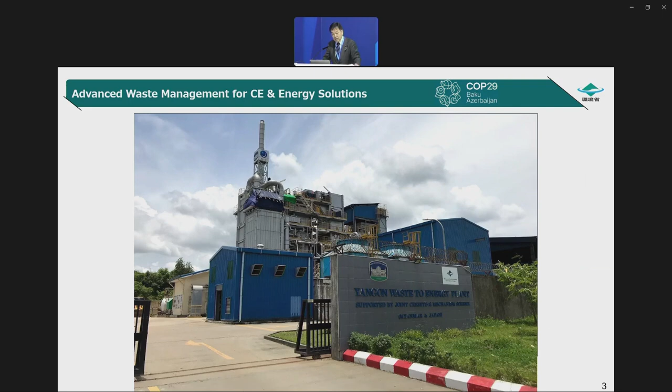At today's seminar, I understand that people from Japan Environmental Facilities Manufacturers Association, or JEFMA, will share their latest technologies and experiences that contribute to both decarbonization and resource efficiency. I believe this will be of help to many countries facing waste-related problems. I conclude my remarks with my wish that today's seminar is very fruitful. Thank you very much, everyone.

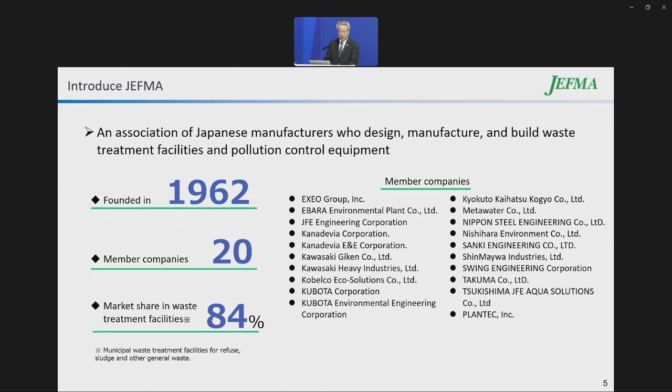JEFMA was established in 1962 to provide excellent waste treatment facilities through improving each other's technology. With 20 member companies, we have constructed about 84% of municipal waste treatment facilities, maintaining high quality standards. Let me explain what JEFMA is doing.

Today, we face two big challenges towards the realization of a sustainable economic system. One is achieving a circular economy, and the other is fighting climate change. These two challenges are closely connected, and we need solutions that achieve both at the same time.

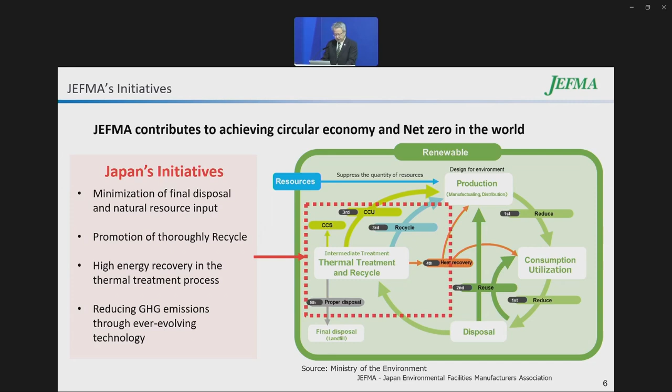While promoting the 3 R's - reduce, reuse, and recycle - we focus on 2 things: recycling as much as possible and getting the most energy from waste. This way, we contribute to both resource circulation and decarbonization.

In Japan, rapid economic and population growth led to increasing waste. This caused problems like bad smells from landfills, dirty water, and pest problems. Additionally, Japan doesn't have much land, so we needed a solution for landfill site shortage. That's why Japan promoted the introduction of waste-to-energy and material recycling facilities from the perspective of sanitary waste treatment and volume reduction. As a result, nowadays, very little waste goes directly to landfills.

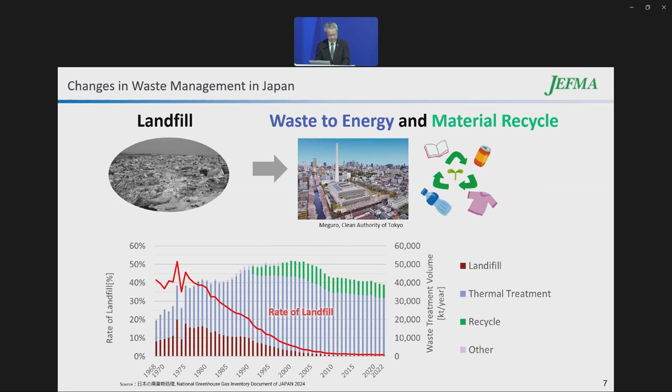Second is cutting methane gas. As you know, methane is 25 times worse than CO2 for global warming. When organic waste goes to landfills directly, it emits a lot of methane.

Third is generating electricity - we can turn waste into clean power. Fourth is keeping cities clean - appropriate waste collection stops unsafe dumping and makes cities clean.

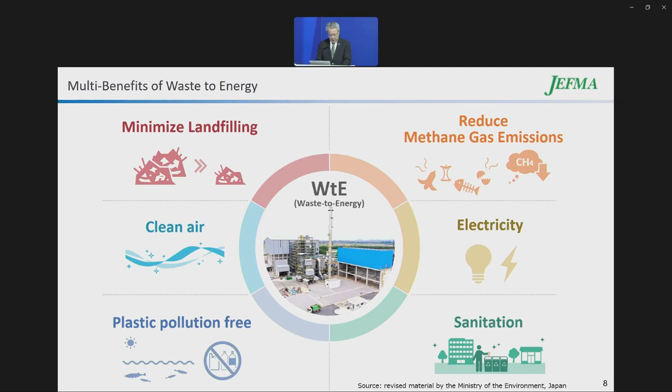Fifth is to prevent plastic pollution, especially to the ocean. Waste-to-energy can safely handle plastics that can't be recycled. Last is cleaning the air - waste-to-energy plants work with proper technology to clean the flue gas in Japan, so they can work safely in cities.

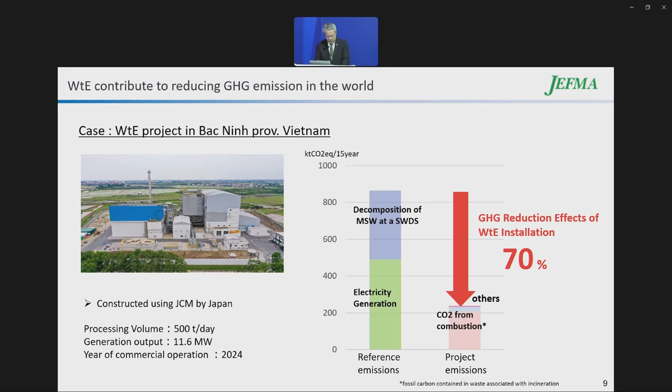Let me share a real example from Vietnam. We built a waste-to-energy plant under Japan's joint crediting mechanism called JCM. According to calculations, this plant cuts greenhouse gas by 70% over 15 years, even counting the CO2 from waste thermal treatment, compared to landfill. This proves that waste-to-energy really works for greenhouse gas reduction and fighting climate change.

To achieve Japan's 2050 net zero target, JEFMA has developed its own technology development goals. We are focusing on methanation for the waste sector, aiming to complete demonstration and practical use in society by 2040, and continue to promote its expansion.

I'd like to introduce our latest developments. We are working on 2 exciting projects. One is finding ways to capture CO2 from waste-to-energy plants and put it to good use. The other is developing technology to turn waste into useful chemicals, like ethanol.

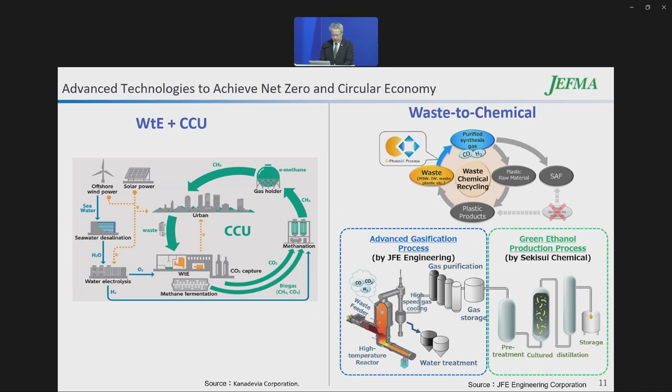Both technologies are now in the demonstration phase, and we are working to make them ready for commercialization. We continue to contribute to the realization of a global circular economy and achieving net zero by 2050 as our mission. Thank you for listening and for your time. Thank you very much.

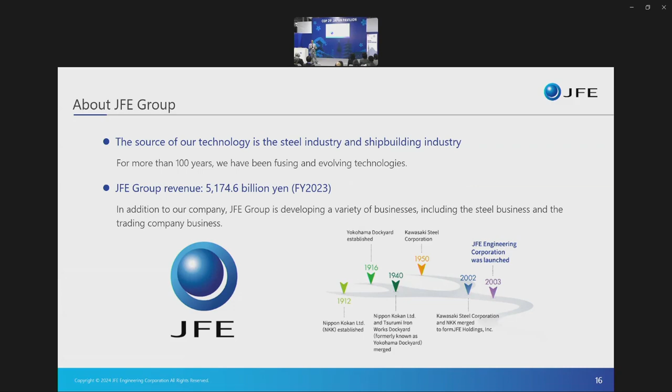It's interesting to note that in fiscal 2023, nearly half of our top line was achieved through solutions in the environmental sector, like waste to energy. But apart from that, we are also present as a major player in power, infrastructure, and energy.

But JFE is not just a technology and an EPC player. We also partner with our clients to offer operation and maintenance services. We build customized recycling solutions, but that's not all.

We go the extra mile to partner with our clients to offer investment solutions. For example, the Bac Ninh waste to energy facility that Oshita-san just mentioned, our role was not just a technology and EPC player, but we are also a co-investor in this facility. So we'd like to partner with our clients at various stages of their business to become a true stakeholder in their solutions.

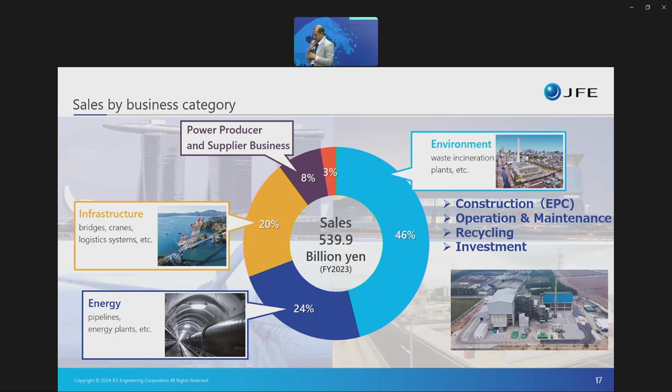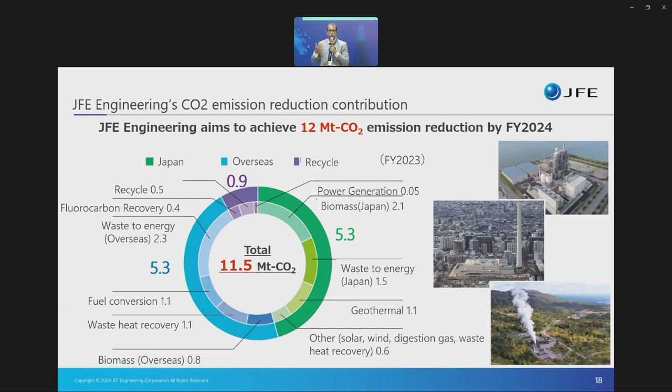In 2023, our decarbonizing solutions achieved 11.5 million tons of CO2 emission reduction. This was built not only through our waste to energy solutions, but a whole host of other decarbonizing solutions, like waste heat recovery, biomass, geothermal, solar, and so much more. In fact, this achievement gives us the confidence to achieve our midterm fiscal 2024 target of 12 million tons of CO2 emission reduction, thereby solidifying our commitment towards decarbonizing the world.

We're very, very glad to be here. We have wonderful memories of COP27 at Egypt. And I say this because it's only through a dialogue with like-minded allies that we can truly develop solutions that can take us towards our journey of achieving true circularity and a net zero state in the world.

I'd like to now take you through some of our technology solutions, particularly related to recycling, waste to energy, and then we will look at carbon capture, utilization, and storage in this section.

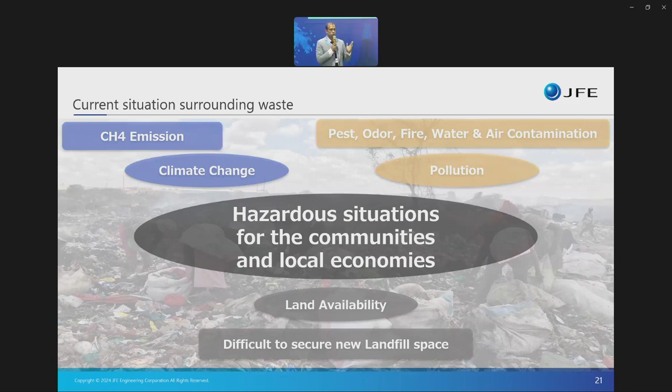Let's talk about recycling for a moment. Why is that important? Because as we stand here right now, untreated waste is a menace to human life. There are many cities around the world where the air quality index is termed hazardous because of untreated waste. It pollutes our land, air, water, and is a general hazard to our ecosystem.

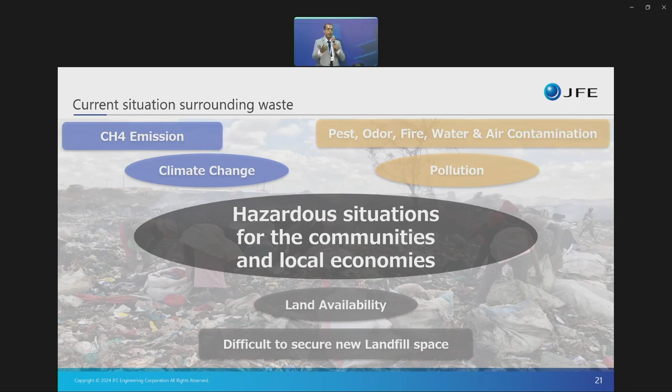So I think that today we are in a situation where it's an all hands on deck approach. And that is why we need to join hands here to be able to develop solutions that I'm going to elaborate on right now.

At the heart of circularity lies recycling. And that's why I'd like to talk a little bit about our recycling solutions. At JFE, we build customized solutions for recycling separate streams of waste.

For example, if you take up the biodegradable waste component, like food waste, we have digesters that process this food waste and produce biogas, which in turn can be used for producing electricity. In effect, we are recycling the biogenic CO2.

Now, for the non-biodegradable component, we have separate individual streams of recycling. For example, we have PET bottle recycling. We have solutions for fluorescent lamp recycling, solar panel recycling, and so on and so forth. But also, this non-biodegradable component can be taken to a waste-to-energy plant to derive electricity out of that.

But if you see, essentially the philosophy of treating such waste is centered around processing and disposal. But we believe that we can do more. In order to transition from processing and disposal and truly utilize the value of the carbon and the hydrogen in the waste stream, we need to transition from processing and disposal to utilization.

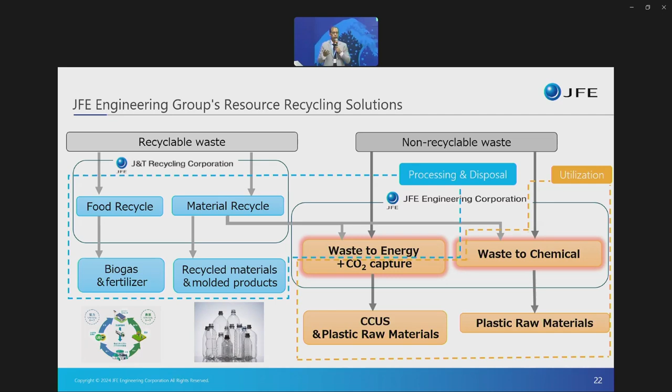And in terms of utilization, this is where advanced technologies like waste to chemical and CCUS really come into the fore. And that is what we are here to describe and share with you as to how we can unlock the value by utilizing the carbon in the waste stream.

To start with, let's take a look at waste to energy. At JFE, we have 50 years of experience in constructing and operating waste to energy plants. And this is built on the simple philosophy that the incoming waste should be scientifically treated and disposed in an environmentally compliant manner. So the incoming feed, be it municipal solid waste or non-hazardous industrial waste, is then taken to our proprietary grate system and combusted in controlled conditions.

The heat that is generated from combusting the incoming waste is then recovered and used to generate steam, turning a turbine for generating green electricity.

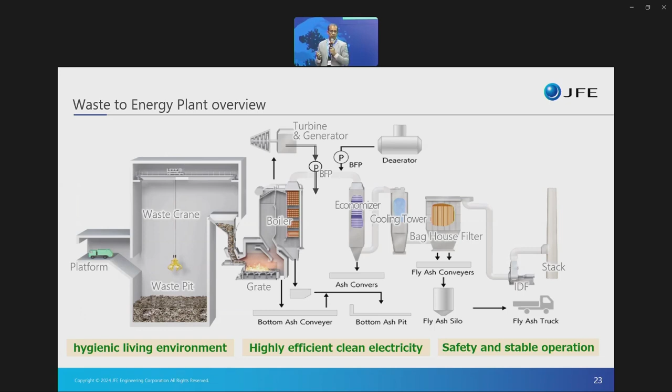Now, the benefits of a waste-to-energy plant are multifold, but chief amongst them is a contribution towards the quality of human life, a hygienic living environment. We also are able to generate electricity which is not dependent on fossil fuels. So you're not adding to the carbon cycle. And because we have more than half a century of experience, the plants are inevitably safe and reliable.

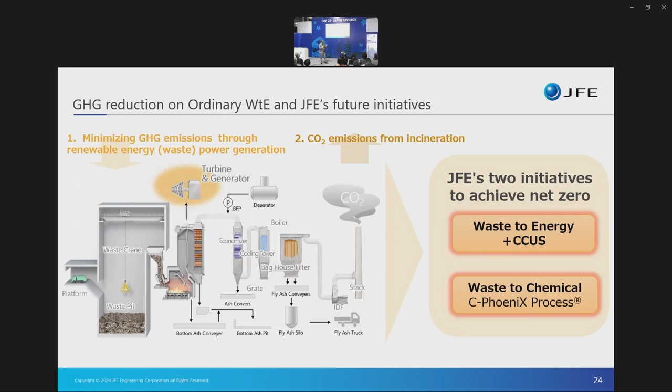Mature as though this technology is, we still believe that while we are generating green electricity from a waste-to-energy plant, the flue gas released into the atmosphere represents a loss of opportunity because it contains CO2, which you can capture. That is where advanced technologies like CCUS and waste to chemical can really make a difference and play a role.

Maybe we should address a fundamental question: why should we do this? I think Oshita-san already addressed it, because waste to energy plus CCUS, while it can reduce emissions, also addresses one potent area of minimizing methane emission to the atmosphere. And as we have seen, methane is one of the most potent greenhouse gases. Curiously, it also contributes towards reduction of marine plastic pollution, and that's something I'd like to explain to you.

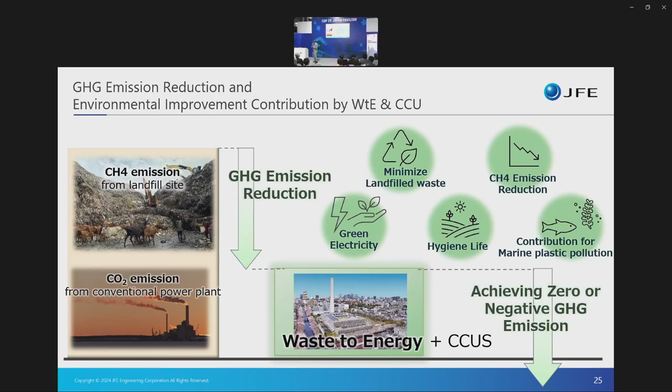Now, take for example any waste to energy plant where you have the flue gas which is let off into the atmosphere. This flue gas contains CO2, which if you are able to capture, you can store it, or you can utilize it for various end applications.

For example, you can use this CO2 for agricultural use. It has mineral-related applications. You can also blend the CO2 with hydrogen to produce methanol, and methanol is the building block for producing plastic bottles, tanks, and even sustainable aviation fuel. So the utilization of this is multifold, but most importantly, you are able to capture and reduce the non-biogenic waste. You're able to enhance the circular economy approach, and you're effectively able to close the carbon loop. That is the advantage of this.

And this is no longer just theory. What I'm talking to you about has actually been practically established. At our Fujimi facility in Tokyo, where there's a waste-to-energy plant constructed by JFE, we have also implemented a carbon capture facility at a pilot scale. Would you like to see how this is done? Let me show you.

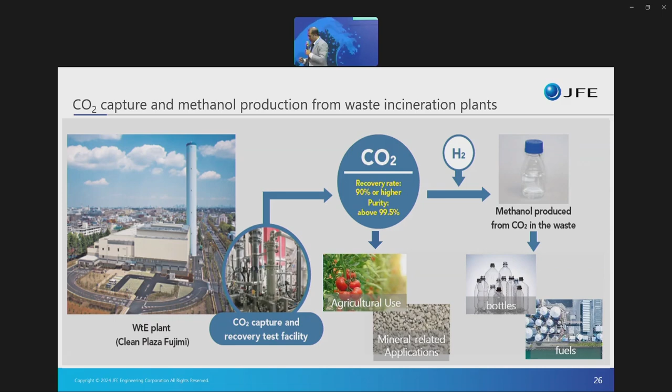At this facility, the flue gas, which would have otherwise been let off into the atmosphere, is first taken to a cooling chamber where the temperature is reduced. This is done because at lower temperatures, the efficiency of CO2 absorption increases.

After this, the flue gas is reacted in an absorber with an amine-rich solvent. This captures the CO2 in the solution, and it is then taken to a regenerator where the CO2 is released by means of increasing the temperature.

The CO2 that is recovered has a purity fraction in excess of 99.5%, and we are able to recover more than 90% of the CO2 in the flue gas. Why is this important? Because with a solution like this, you're able to achieve a negative carbon emission status in all waste-to-energy plants. Thus, this is truly a revolutionary technology in terms of enhancing carbon emission reduction and the circular approach.

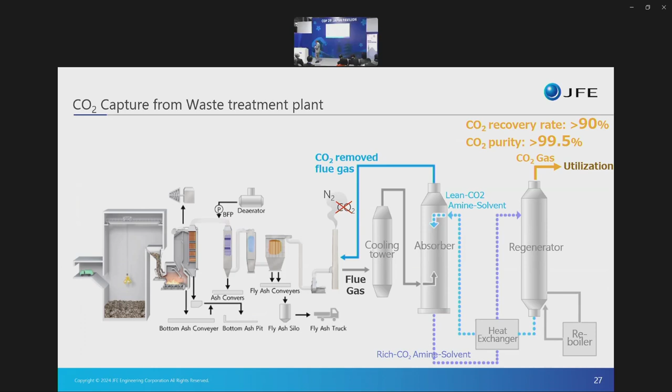And talking of a circular approach, may I now take you to the pinnacle of our next generation technology, which is waste to chemicals.

Now, we saw that with the CCU solution, we are able to capture the CO2 and reduce emissions. But my question to you is, what if we could eliminate the emissions altogether? And what if we could also reduce fossil fuel usage? With our waste to chemical solution, we are able to process incoming feed like municipal solid waste, plastic waste, and industrial waste, and we are able to create syngas.

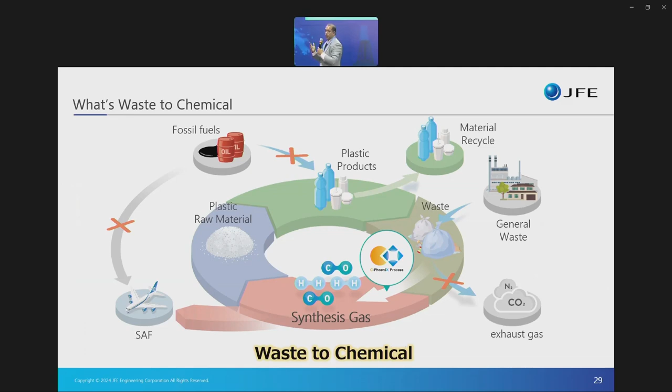Now, this syngas is the foundation block for creating varied applications. For example, you can create plastics, you can create sustainable aviation fuel. You also have the option in future to create free hydrogen from this.

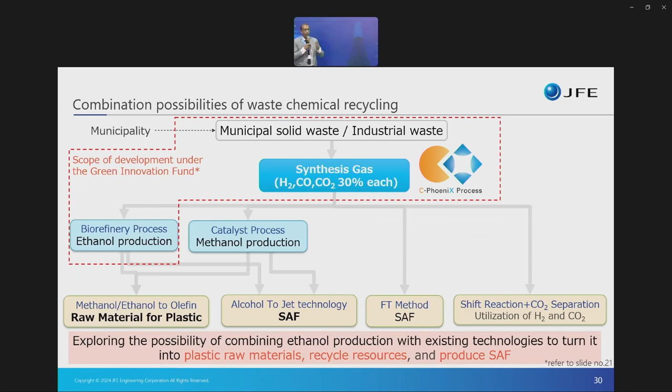As I mentioned, the heart of the system lies in producing syngas from various feed. You're not dependent just on a specific feed, but can process municipal solid waste, industrial waste, or various other feed to produce syngas. This syngas can then be taken through a biorefinery process to produce ethanol, or a catalytic process to produce methanol. These are the foundation blocks for producing plastic, aviation fuel, or hydrogen, as I mentioned. So let me now explain how we are able to achieve this, and what's really different about our solution.

Like I mentioned, the key is producing syngas, because once you get that, you're able to produce all the other requisite materials. Now, JFE has the experience of over 20 years in construction and operation of gasification systems.

So with this experience comes the know-how to produce syngas in an efficient and reliable manner. Now, why is this different and how is it different? It's different because unlike other systems, this is a pure oxygen gasification reaction. And what this does is that the energy content in your syngas is substantially higher than other forms. So techno-commercially, this becomes a very lucrative proposition.

What we do is the feed, which is municipal solid waste or plastic or industrial waste, we introduce it to a high temperature gasifier with temperatures reaching maybe about 1600 to 2000 degrees centigrade. At such high temperatures, the carbon in the incoming waste is gasified in a partial oxidation means. The gas cracks the organic compounds and melts the incoming inert materials and metals.

Post this, we rapidly cool by water quenching so that we avoid the reformation of complex compounds. This results in the formation of syngas, comprised mainly of hydrogen, carbon monoxide, and carbon dioxide. This syngas is then cooled and scrubbed to ensure we remove sulfur and other impurities. Once we have a clean syngas, it has various end applications, as I just spoke to you about.

Now, the Japan government, in a bid to provide an impetus and incentivize decarbonizing solutions, have established a 2 trillion yen fund to promote decarbonizing solutions and future initiatives like what I just mentioned. Under this fund, JFE has taken on the responsibility to construct and implement a waste-to-chemical plant at our Chiba facility by 2025. This is a prototype plant, and post-establishment, we're looking to partner with global entities to offer the waste-to-chemical solution at a commercial scale worldwide.

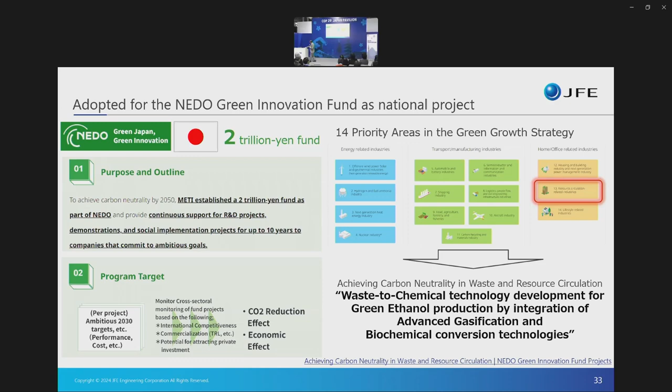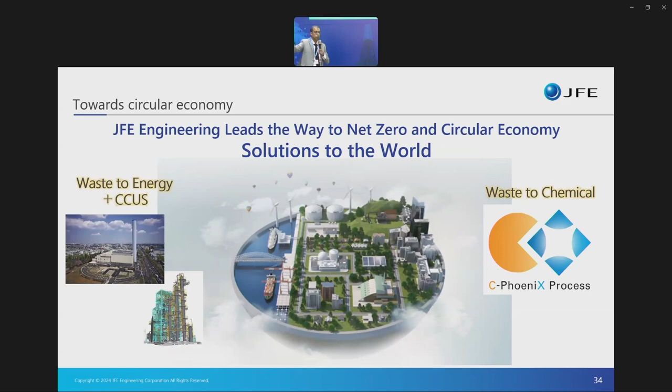And this brings me to a conclusion of my presentation. We believe that in order to solidify our commitment towards achieving a decarbonized and net zero state in the world, solutions like CCUS and waste to chemicals are extremely pivotal to strengthen our journey between now and achieving a truly circular economy and net zero. My name is Soumya, and here at JFE, we stand just for the Earth.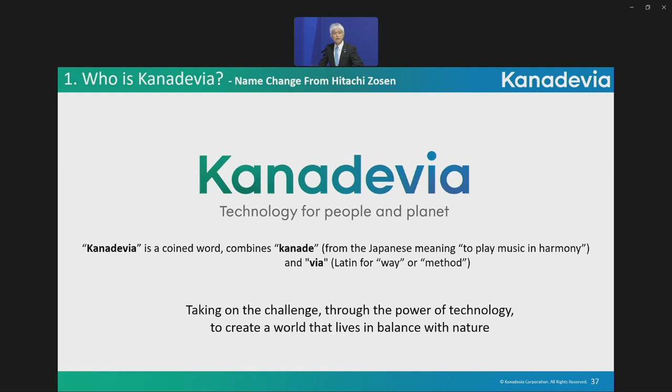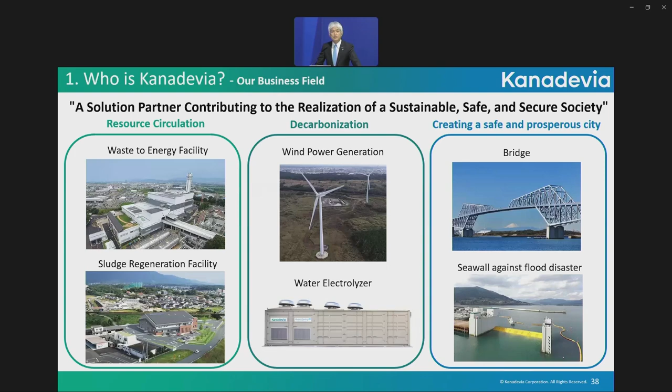These are our business fields. The ideal position of our company is as a solution partner, contributing to the realization of a sustainable, safe, and secure society. We are developing three business areas: resource circulation, decarbonization, and creating safe and prosperous cities.

We have endorsed TNFD recommendations, and as an early adopter, we issued a TNFD report this October, focusing on waste to energy and biomass power generation business. We position maximizing environmental resilience as a materiality. Based on the planetary boundary concept, we aim to keep the environmental impact of our business activities and entire value chain within the range of original environmental resilience of each country and region. This is our vision of a resilient eco-society.

This is our history of waste to energy business. It started in 1960 with a technical collaboration with Von Roll, a waste to energy manufacturer in Switzerland. In 1965, we built the first waste to energy plant, Osaka, in Japan. In 2010, we acquired Inova and integrated it. Since then, we continue to expand our waste to energy business worldwide.

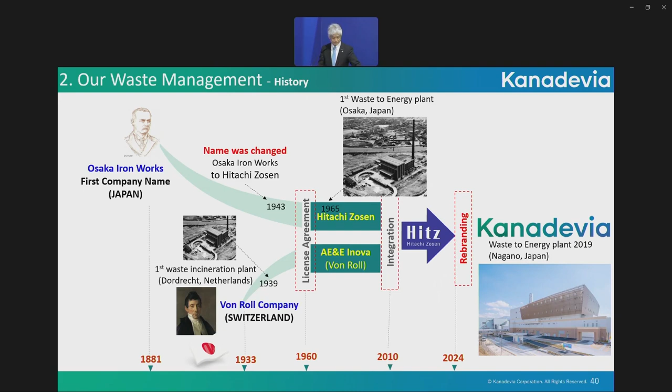This map shows the number of waste to energy plants ordered to Kanadevia Group, including licensees. We got ordered more than 1,500 plants worldwide, and this is the largest global market share.

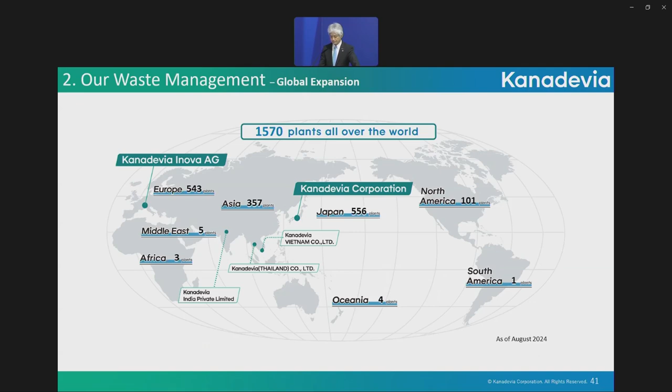This is Kyoto South Clean Center, which is not only waste to energy for energy recovery, but also combines material recoveries and methane fermentation.

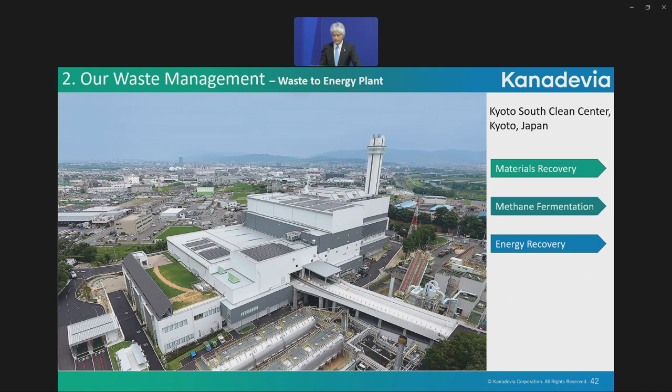This is our reference plant in Dubai, one of the largest waste to energy plants in Dubai. The Dubai government has already declared a policy of use of clean energy, including waste to energy. The construction of this plant significantly contributes to the Dubai government policy.

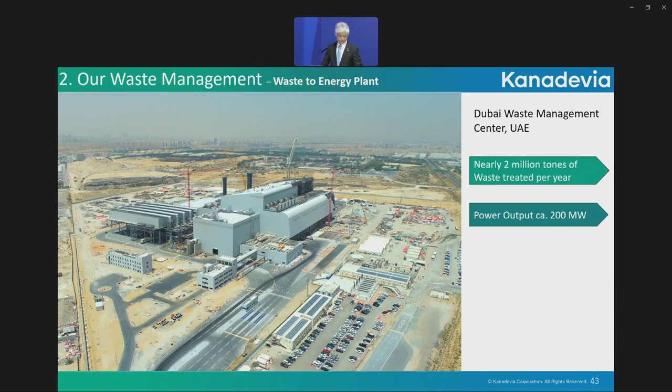This chart shows the relationship between GHG emissions, proper waste treatment, and a push toward a circular economy. Landfill sites discharge a significant amount of methane from organic waste. There is a concern about the discharge from plastics in open dumping into the ocean.

Landfill was the main disposal method up until around the 1950s, but in the 1960s, we introduced the thermal waste treatment plant, improving public health and also reducing environmental load.

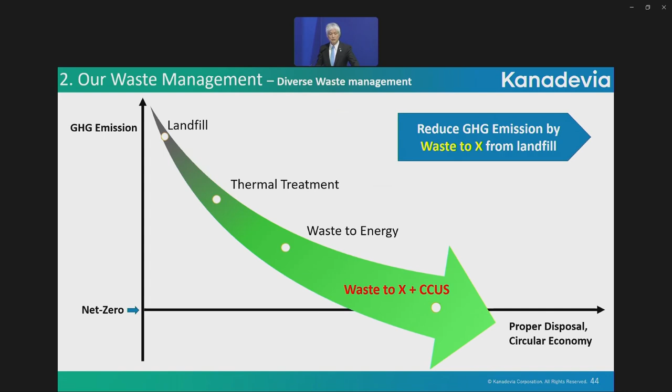Now our challenge is net zero GHG emission by using waste to X, converting the waste into energy and resources, and CCUS, carbon capture and utilizing.

Waste to X technologies we are working on. First, pyrolysis, gasification, and reforming technologies. Through these technologies, waste of various composition is converted into gases such as hydrogen and carbon monoxide.

These gases can be used in a wide variety of applications as a substitute for fossil fuels and raw chemical materials.

Currently, we aim to fiber recycle some of the massive amount of textile waste generated worldwide from fast fashion.

Secondly, this is biomethanation technology. Generally, biogas contains about 60% methane and 40% CO2, but this technology increases the methane concentration through the action of microorganisms.

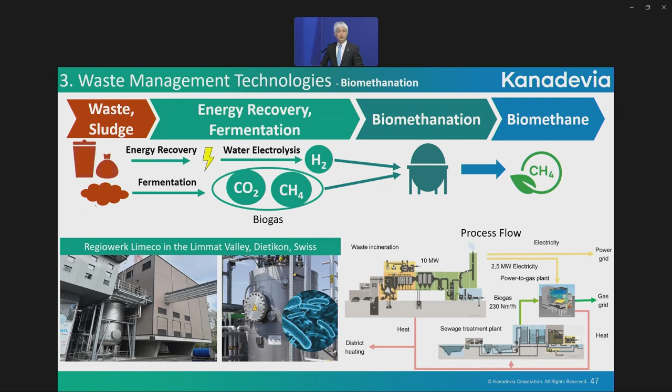The produced gas is upgraded and supplied to the regional gas grid as biomethane.

Next is bioethanol production technology. From mixed waste, the suitable waste for alcohol fermentation is extracted, such as food and paper waste, and then fermented to produce bioethanol.

Furthermore, fermentation residue can be used for methane fermentation process. Therefore, this is a technology producing two types of biofuels.

This produced bioethanol can be used in a wide range of various applications as a substitute for fossil fuels, for example as a raw material for biojet fuel or as a substitute for gasoline.

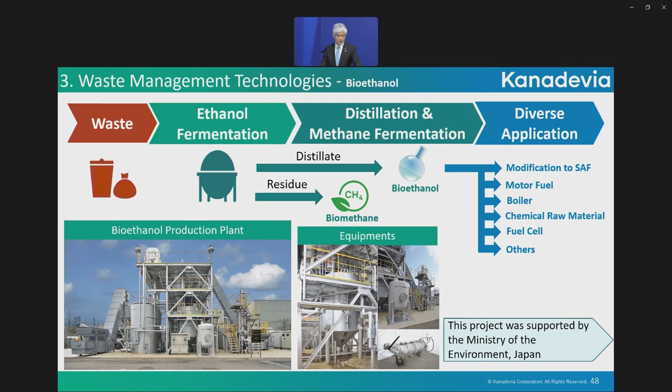This is a demonstration plant for waste treatment plus CCU in Japan. We installed a CO2 recovery unit and catalytic methanation unit at a waste treatment plant in Kanagawa Prefecture. This is the largest methanation plant in Japan at the time, and we succeeded in producing e-methane.

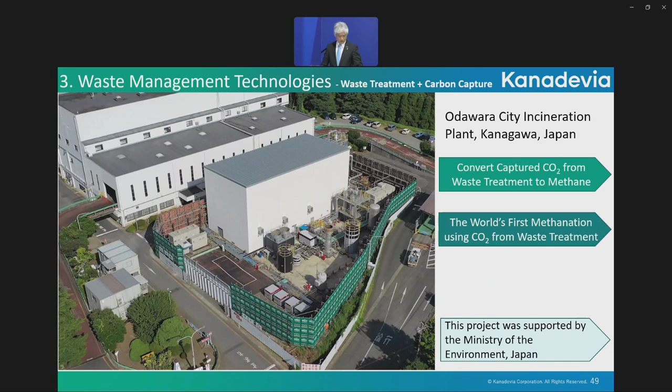This is the first methanation plant in the world using CO2 from a waste treatment plant. With these initiatives, we have found a way to achieve net zero GHG emissions by using CCU for waste that simply cannot be recycled.

Next, I would like to introduce our challenge in the latest national project, including subsidies from the Japanese government. The development budget is approximately 125 million US dollars in the Green Innovation Fund project.

This is a development of waste treatment technology to increase the efficiencies at separation and recovery of CO2. Normally we use ambient air, but this technology uses recirculated gas with high CO2 concentration.

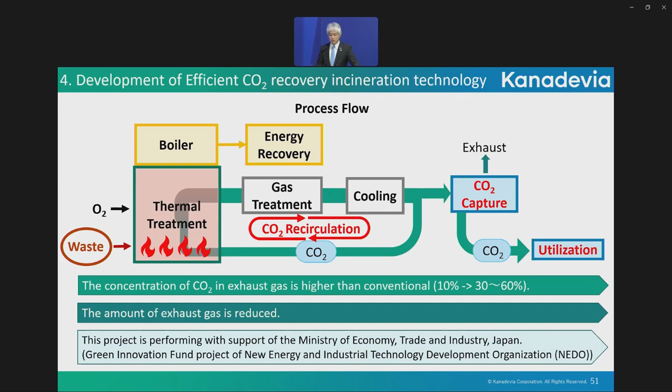So finally, we propose a waste management system that combines our new waste management and decarbonization technologies, for example offshore wind power, water electrolysis, methanation, and others.

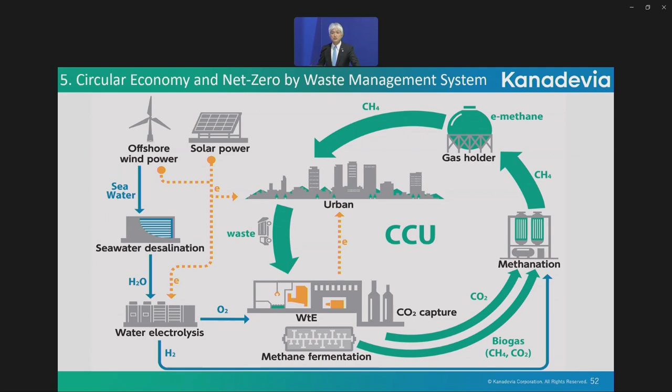I would appreciate it if you could get some sense of how Kanadevia can contribute to a circular economy. As you can see, we can do a lot, but it's so obvious that a single company's effort is not enough at all. The way to achieve circular economy is still so far away, and therefore we really would like to work together with you and connect with you all. I strongly believe we need to connect and collaborate to accelerate the process and find a more excellent way for circular economy. Thank you for listening.

Thank you very much, Mr. Kuwahara. Through the presentation, we can expect the comprehensive waste management system by the technology, and we can say the system is ready for the world. Next, I would like to move on to this presentation, performance of trans-heat container system for energy saving and reduction of CO2 emission, by Mr. Yoshihiro Iwai, Senior Expert, Plant and Machinery Systems Headquarters of Sanki Engineering Corporation Limited. This will be given by video presentation.

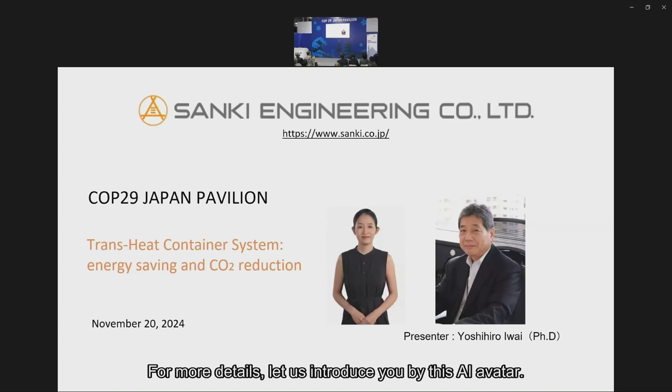Hello everyone. Today's presentation will focus on the performance of the trans-heat container system in terms of energy savings and CO2 emission reduction. The trans-heat container is a registered trademark of Sanki Engineering. This technology was originally developed in Germany in the late 20th century, and we acquired the licensing rights in 2011.

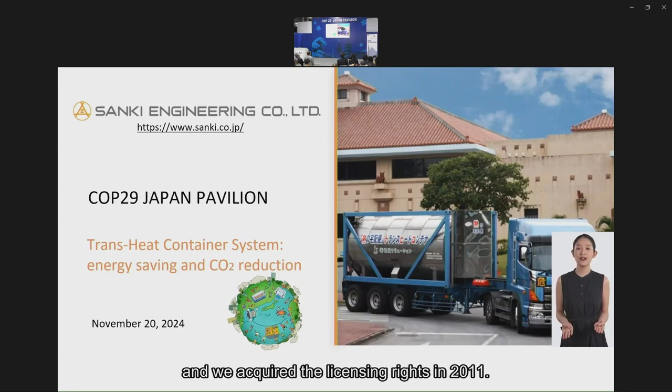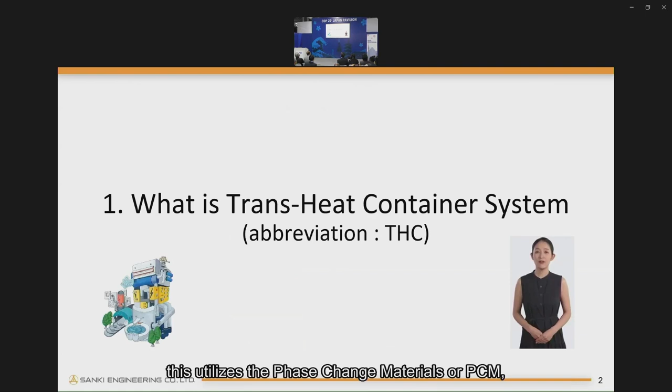The trans-heat container, or THC system, adopts a latent heat storage method. This utilizes phase change materials, or PCM, for offline heat supply systems.

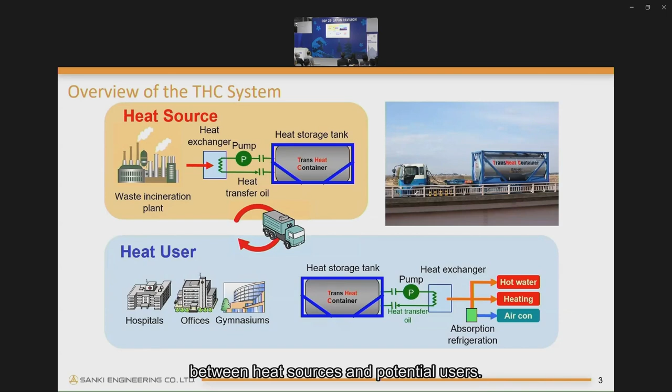The main challenge in utilizing unused thermal energy lies in overcoming the time and distance barriers between heat sources and potential users. For instance, waste heat from factories or incineration facilities can serve as a thermal source, while hospitals or office buildings could benefit as heat users. However, there is often a mismatch in timing or location of heat availability.

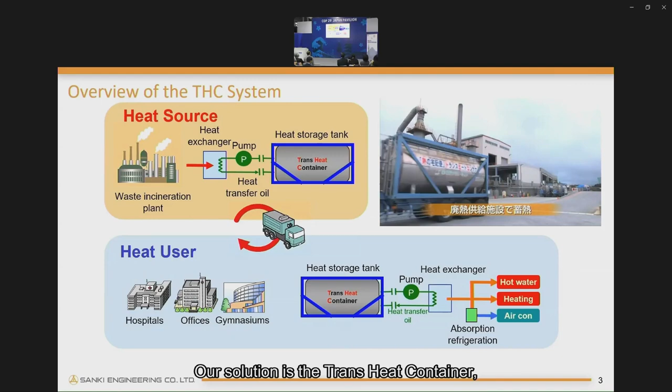Our solution is the trans-heat container, a system that transports heat via containers filled with phase change materials. These containers are transported by vehicles between the heat sources and users. The system includes heat exchangers for both the source and the user, as well as multiple trans-heat containers and a transport vehicle. We will now discuss our practical experiences with implementing this technology in real-world applications.

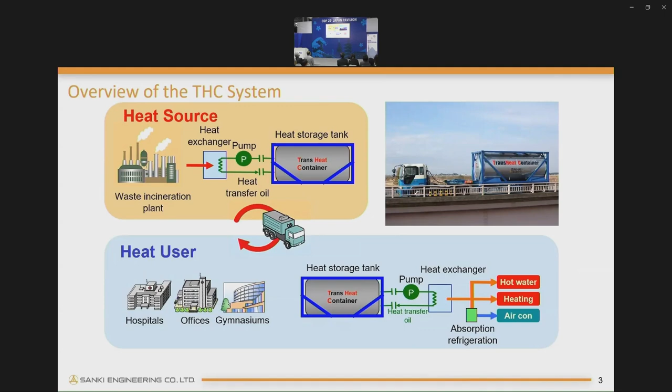We have selected two phase change materials, or PCM, for the system: sodium acetate trihydrate and erythritol. The first reason for this choice is their melting points are ideal for capturing and reusing unused thermal energy. The second reason is safety. Both materials are food additives, making them non-toxic and non-hazardous. Additionally, they are commercially available.

Sodium acetate trihydrate has a melting point of 58 degrees Celsius. This allows for the efficient use of most unused thermal energy up to 90 degrees. From 2004 to 2006, we developed the use of erythritol as a PCM in Japan. Erythritol has a melting point of 118 degrees, and although its heat source is limited to 160 degrees, the stored heat can also be used for cooling. Furthermore, it has a higher heat capacity than sodium acetate trihydrate.

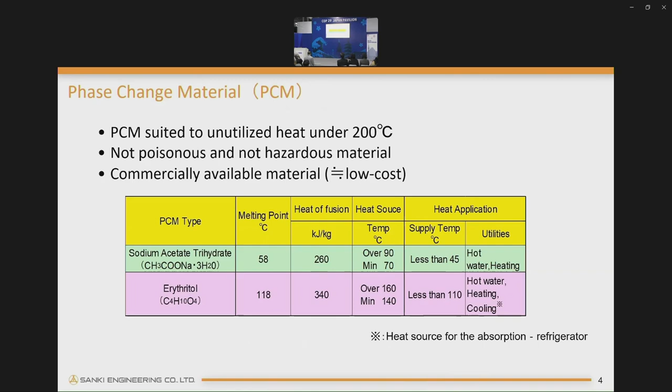During heat storage, high-temperature oil melts the PCM by transferring heat. For heat release, low-temperature oil absorbs heat from the PCM, causing it to change from a liquid back to a solid. The vast surface area of the oil droplets allows for a high rate of heat exchange.

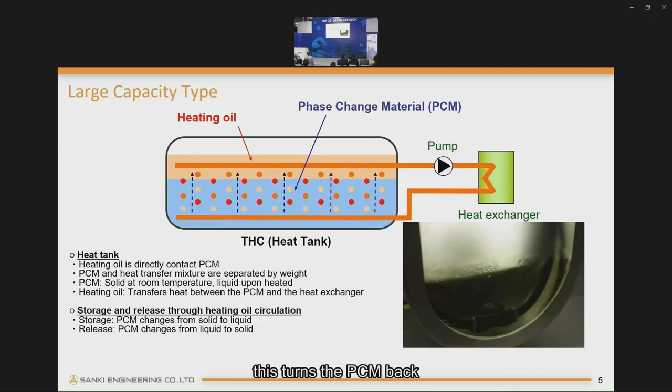The next figure shows a standard capacity type container. The large capacity model isn't suitable for Japan due to road size limitations, which makes it difficult for semi-trailers to operate. To address this, Sanki has developed a smaller, more simple container that works with detachable body trucks.

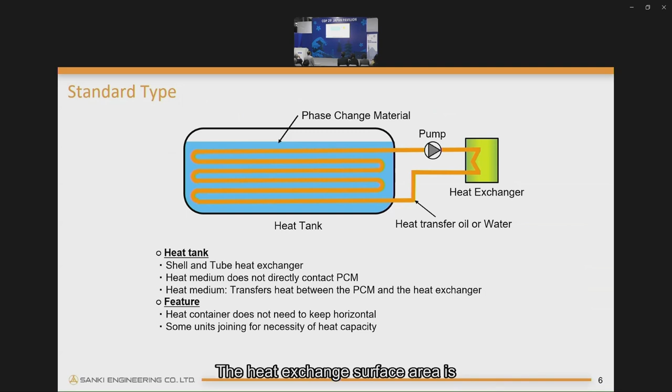This container uses a shell and tube heat exchanger, where the heat medium does not come into direct contact with the phase change material. The heat exchange surface area is limited by the tubes. This results in a lower heat exchange rate compared to the large capacity type, and a greater pressure drop within the pipes. Therefore, this simplified container has some disadvantages compared to the larger model.

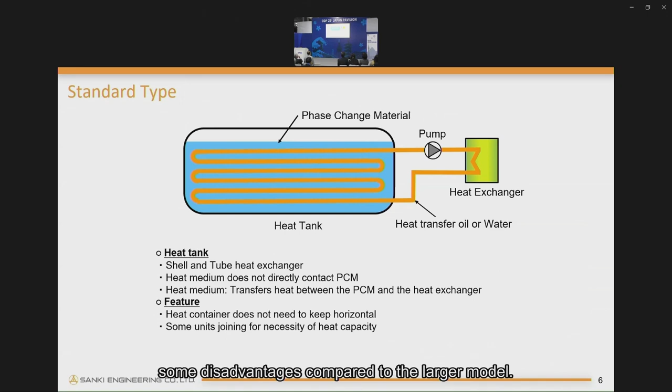Why have we developed this type? It was designed for smaller vehicles, making it easier to set up in typical waste collection containers. Small vehicles can operate without being constrained by traffic regulations in Japan. The container doesn't need to remain horizontal, allowing for simple loading and unloading.

Additionally, there are no special driver's license requirements for these vehicles. Many of our clients are industrial waste disposal operators, with incinerators as heat sources and waste collection vehicles. The standard capacity container can easily be integrated as an attachment to these vehicles. This kind of customization is crucial for making the system practical in Japan.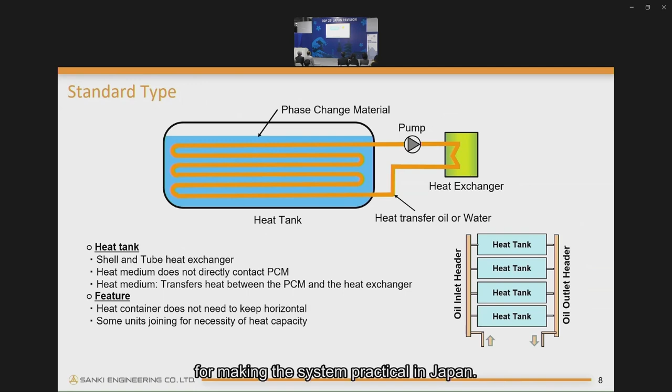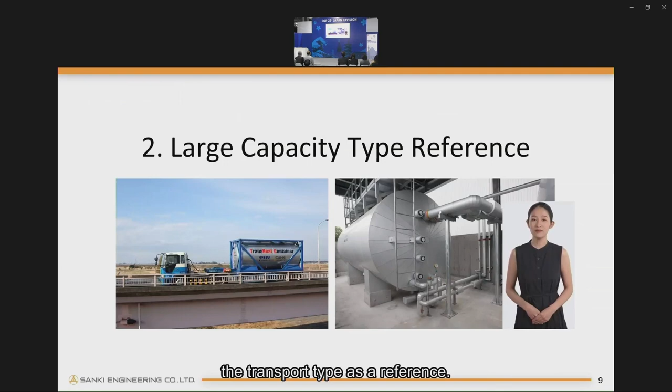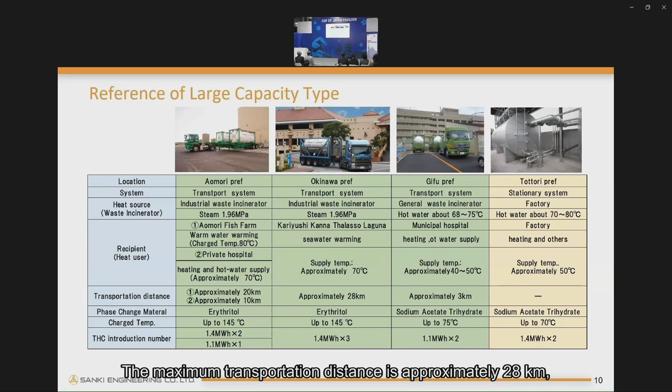This section covers the large capacity type. Let us begin by explaining the transport type as a reference. We have installed the system at 4 locations in Japan: 3 of these are transportation types, while 1 is stationary. In terms of PCM usage, 2 sites use sodium acetate trihydrate and 2 use erythritol. The maximum transportation distance is approximately 28 kilometers, with a delivery time ranging from 30 to 50 minutes.

This section introduces the stationary type, which is used when heat needs to be stored and utilized during different time periods. Let us introduce the stationary type system at a mineral water factory. We installed 2 trans-heat containers using sodium acetate trihydrate. The heat sources include various heat waste from the production area, the primary source being high-temperature compressed air. It is then used to heat the office space.

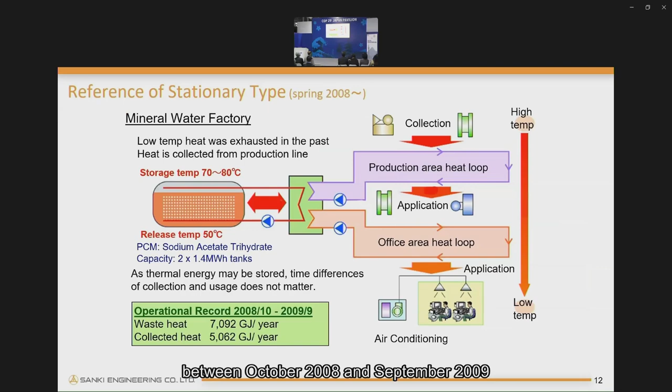This section explains the standard capacity type. We have installed the standard capacity type at 3 sites in Japan: 2 are transportation types and 1 is stationary. Regarding the PCM used, 1 site utilizes sodium acetate trihydrate, while 2 use erythritol. In Toyama, for example, the system is used as a heat source for air conditioning in a tomato plant factory. During summer, the system generates cold water at 15 degrees Celsius by using an absorption chiller.

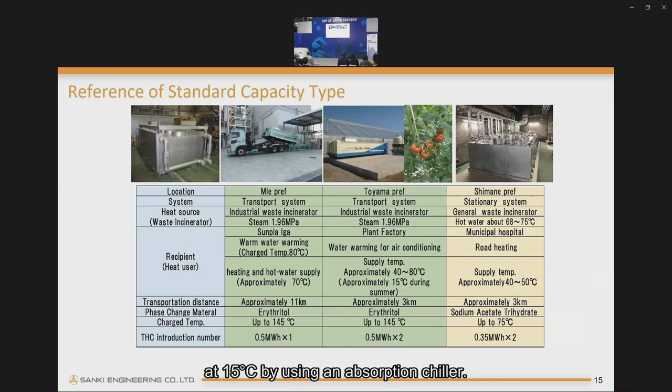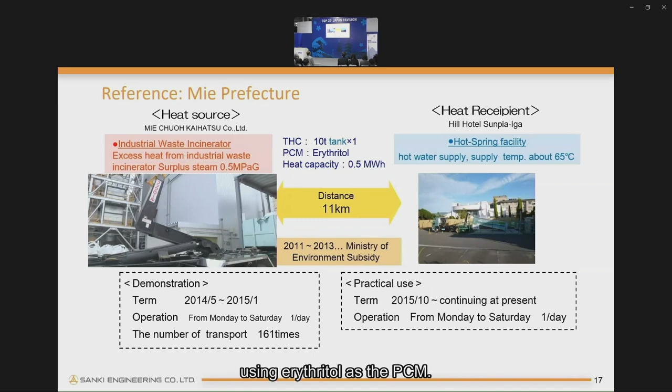This section details a case study for the standard capacity transport model. This photo was taken at a demonstration test facility in Mie Prefecture. The left is the heat storage facility, and the right is the heat recipient facility, with a distance of about 11 kilometers between them. The heat source comes from excess steam generated by incineration facilities, using erythritol as the PCM. Each container has a heat storage capacity of 500 kilowatt-hour and is used to heat water.

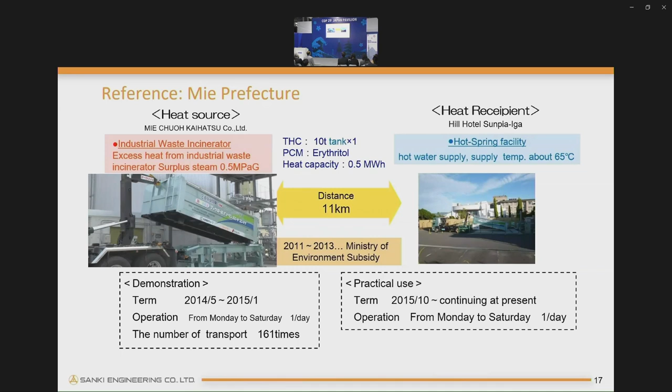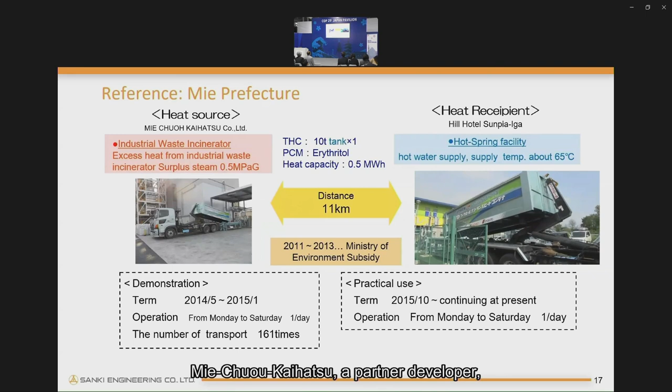The site test was conducted from May 2014 to January 2015. During this period, 161 heat supply cycle tests were completed. After this test, Mie Chuoh Kaihatsu, a partner developer, converted the test facility into a commercial one. Since October 2015, the facility has been in full operation, with 217 heat supply cycles performed. As of 2024, these facilities continue to operate commercially.

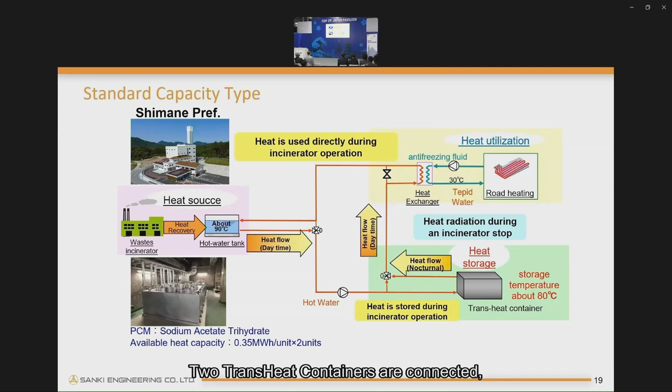This section explains the stationary type model. This facility has been operating with the latest technology since 2022. The system is integrated into a waste incineration facility, running 16 hours daily. It stores heat in the daytime when the facility is operated and releases it at nighttime when the facility is idle. While the incineration facility is active during the day, the system simultaneously supports road heating and heat storage depending on demand. 2 trans-heat containers are connected, each with a capacity of 350 kilowatt-hour.

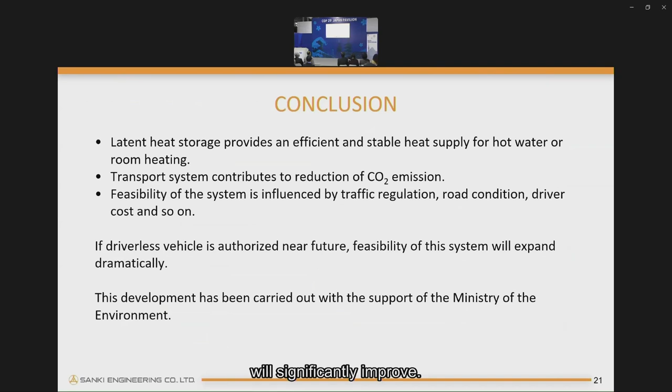To conclude, latent heat storage provides an efficient and stable heat supply for hot water and room heating. The transport system also contributes to reducing CO2 emissions. However, the feasibility of the system is influenced by factors such as traffic regulations, road conditions, and driver costs. If autonomous vehicles become authorized in the near future, the viability of the system will significantly improve. We are excited about the potential of driverless vehicles. This development has been supported by the Ministry of the Environment.